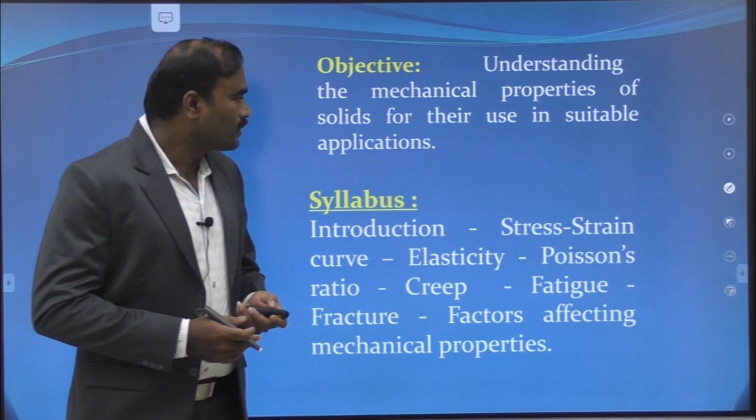Now we shall see in detail about the mechanical properties. We have various types of properties such as optical properties, electrical properties, thermal properties, magnetic properties and mechanical properties. Among the mechanical properties, four are the important ones.

They are stiffness, strength, hardness and ductility. So these are the four important mechanical properties of solids.

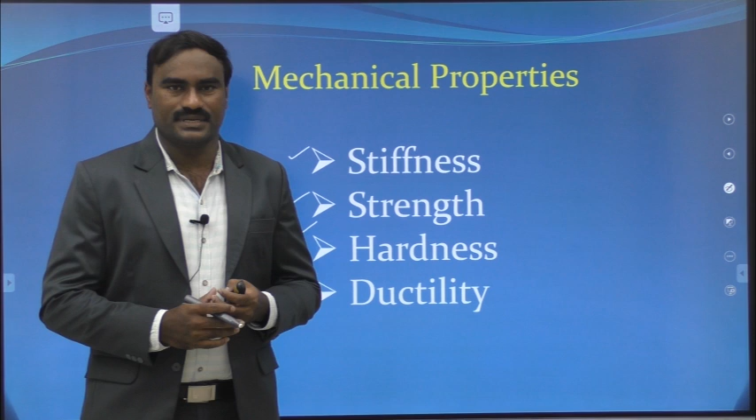Now we are going to see in detail about these properties: what is stiffness, what is strength of a solid or material, what is hardness of a material, and what is the ductility of a material.

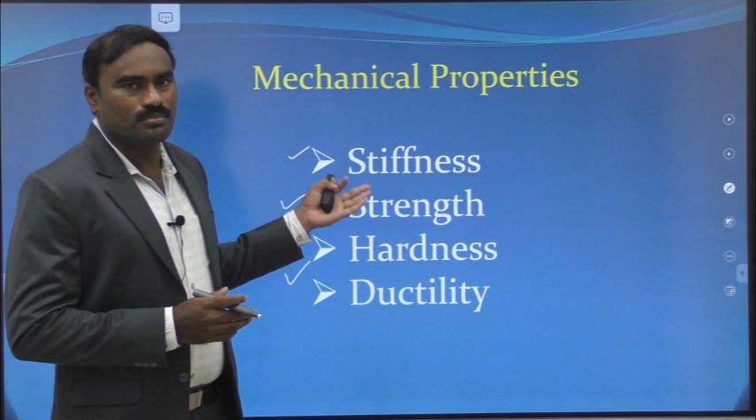Before we study about the mechanical properties of solids, we should have a minimum knowledge about what these four properties are. Now let us see one by one.

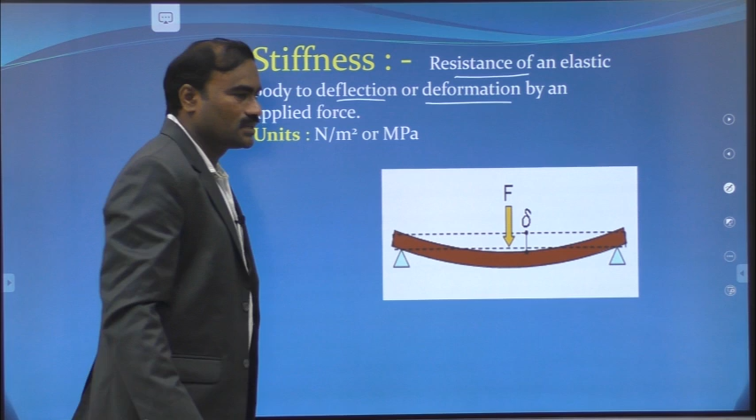First of all we shall see stiffness of a material. So what is the stiffness of a material? It is nothing but the resistance to elastic deformation - the resistance of an elastic body to deflection or deformation. That means the opposing force to bend itself, or the opposing force to changes in its dimensions, or the opposing force to strain. Now let us see what is stiffness.

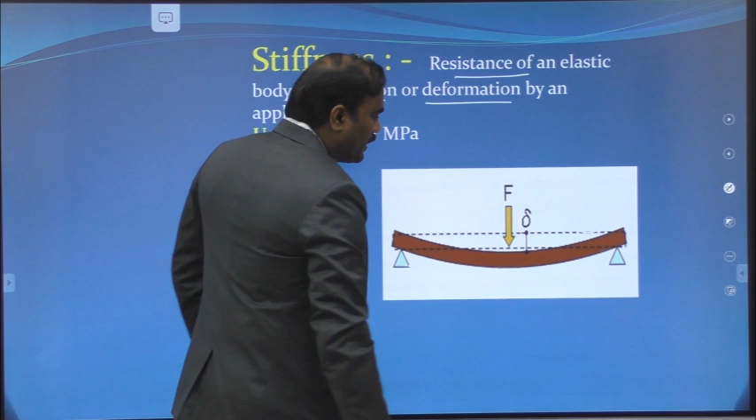Suppose if I take a particular body of original length L, and if I put that body on two supporting pillars, and if I apply some force - suppose this is a solid piece, let us suppose this is a wooden scale.

If I put a mass, a body of mass m on the wooden scale, what happens is a gravitational force of mg will be acting in the downward direction. So a force equal to the weight of the body will be acting on this wooden scale.

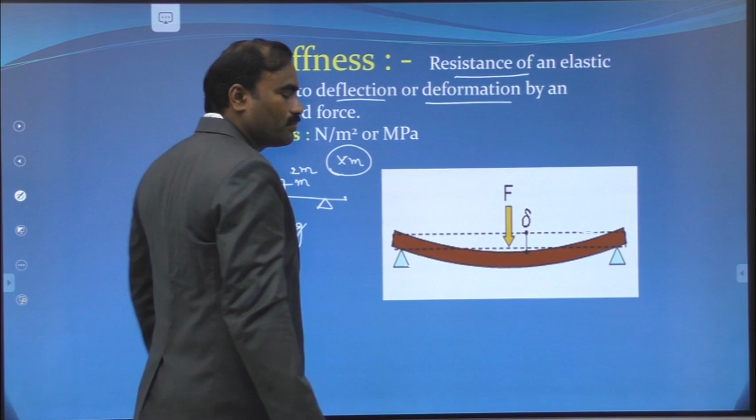Suppose if the mass of the body is very small, then there won't be bending of this wooden scale. Suppose if I increase the mass to 2m, let us suppose even for 2m also there is no bending. Suppose if I keep on increasing the mass of the body placed on the wooden scale, at a particular mass xm, this wooden scale starts bending like this.

So the mass, or the force, at which the body suffers a deflection or undergoes changes in its dimensions is called the stiffness of the body. Until the force or load is less than this xm, it will not undergo any deflection or deformation. That load or force can be considered as the stiffness of the body.

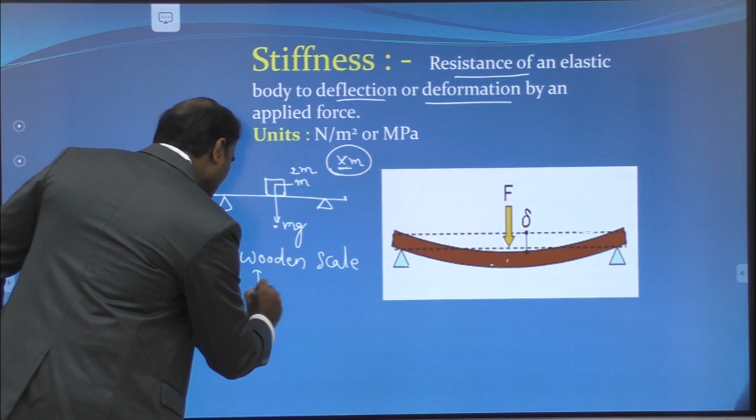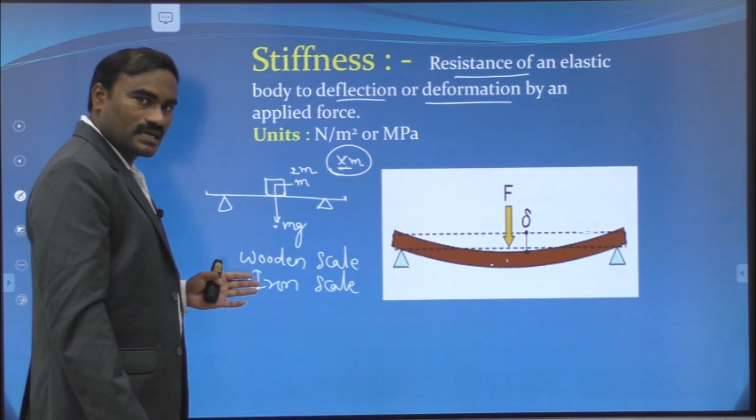If the material is more stiff, then it will bear more load, meaning we need to apply more force to bend it. For example, if I take a wooden scale and an iron or steel scale, which one is more stiff? Obviously the iron scale is stiffer than the wooden scale, because to introduce a deformation or deflection in the iron scale, I need to apply more load or force compared to the wooden scale.

So iron scale is stiffer than a wooden scale. The stiffness of a body is nothing but the resistance of the body or a solid or a material for deflection or deformation. So that is called stiffness of the body, which is a very important parameter of solids or materials, and we are going to see its significance in the coming discussions. So this is all about the stiffness of the body.

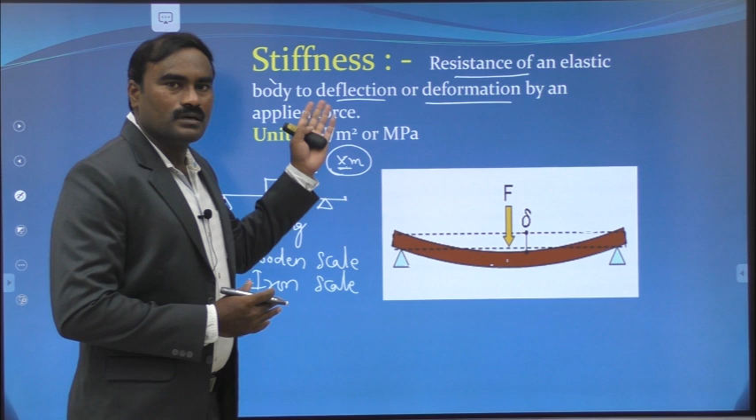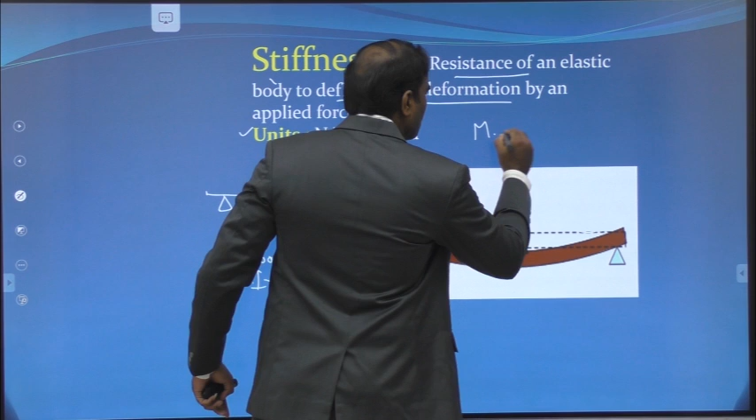Now the units for stiffness of a solid or material are Newton per meter square, or megapascal. The force which is generally applied per area. Pascal is nothing but the unit for pressure, and pressure is nothing but force per unit area. So Newton per meter square, or generally stiffness can be measured in units of megapascal. One mega means 10 power 6 pascals, or 10 power 6 Newton per meter square, since pressure is equal to force by area. So this is the unit for stiffness of a solid or a material.

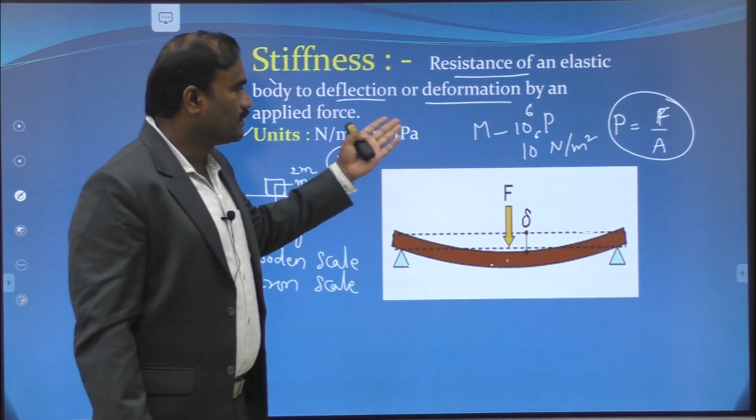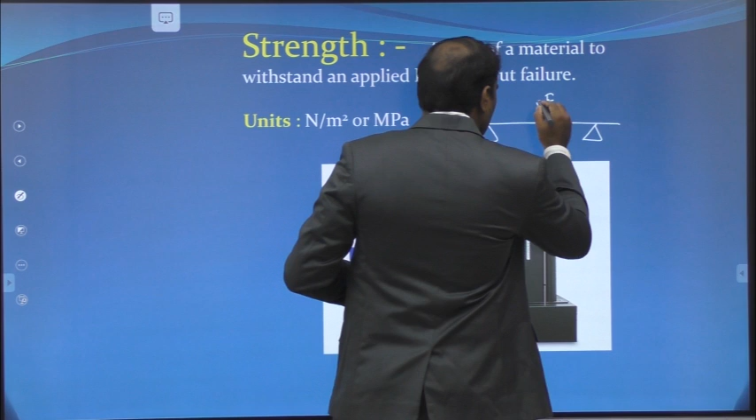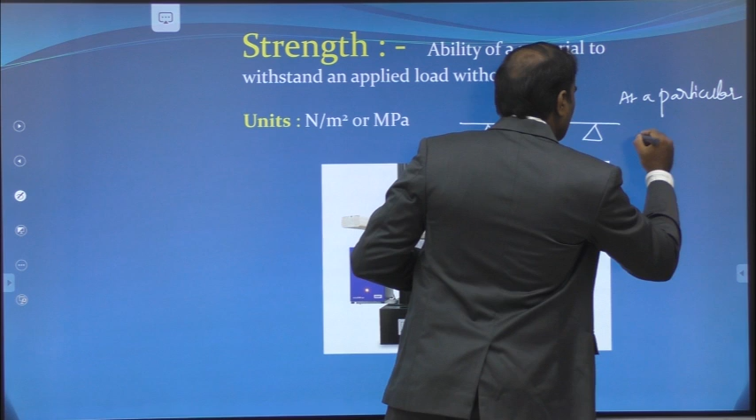Now let us see what is the strength of a material. As we saw in the previous case, suppose if we apply some load on a wooden scale, at a particular value of force it starts bending. Suppose if I apply more force, then what happens if I keep on increasing the force or load on this wooden scale? At a particular load, this wooden scale will break into two pieces. So it breaks into two pieces like this.

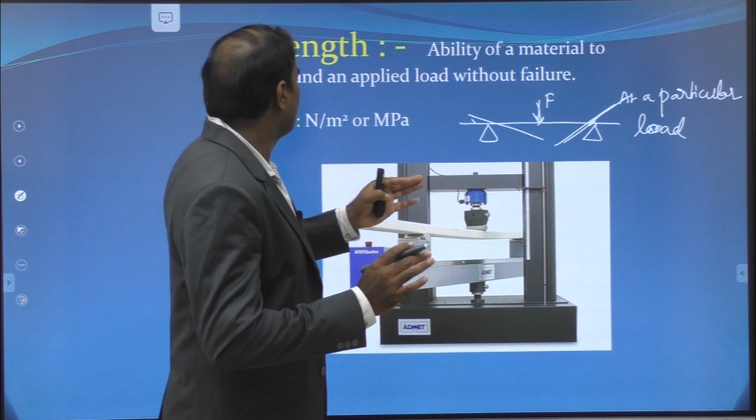The ability of a material to withstand an applied force or load without failure is called the strength of a material. In other words, we can say the ability of a material to withstand an applied load before its failure or before its fracture, that means it breaks into two pieces. The amount of load at which the material breaks into two pieces is equal to its strength.

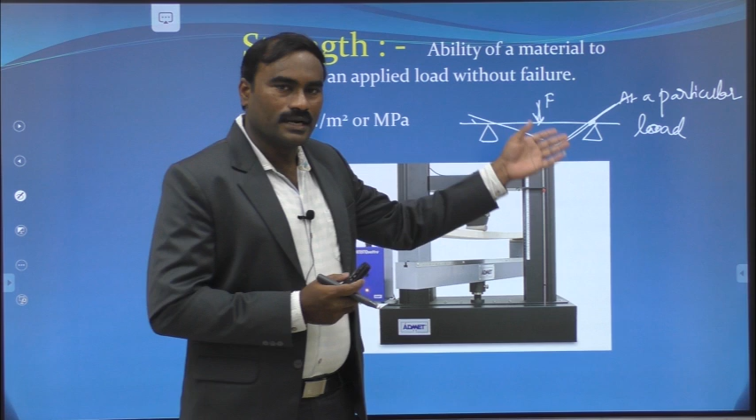So the units of strength are also megapascal, because stiffness is also nothing but the load at which, or the resistance of a body to deformation, that is also nothing but the load. Here also what we see is we apply load until the material breaks into two pieces. That means the force or load required to break the material into two pieces is nothing but the strength of that particular material, so it is also measured in megapascal.

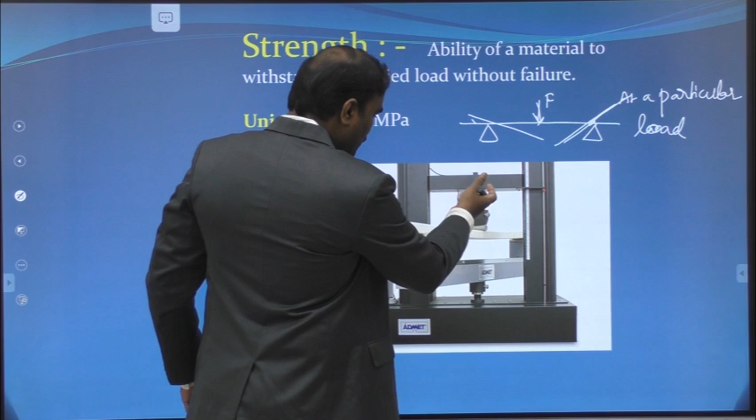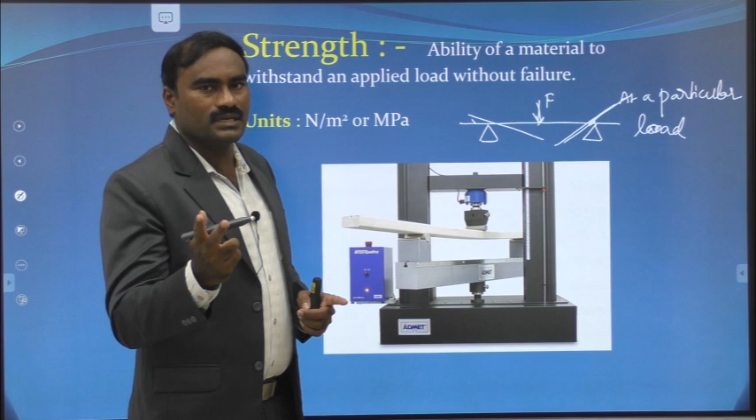You can see in this diagram, we have a wooden bar, and a force can be applied by using the machine. The amount of force applied by this machine can be read from the machine's electronic circuitry. As the force increases, there won't be any deformation until a particular force, but at a particular force this wooden bar starts bending. That means that force or load at which this wooden bar starts bending is equal to its stiffness. If we keep on increasing the force, at a particular force or load this wooden bar breaks into two pieces, so that load will be equal to its strength.

So in brief, what is stiffness and what is strength? Stiffness is nothing but the resistance of a body or material to deflection or deformation. That means the load or force at which the body starts bending is equal to the stiffness of that material. Suppose if you keep on increasing the load or force, that particular body breaks into two pieces, and the load at which it breaks into two pieces is equal to the strength of that particular body.

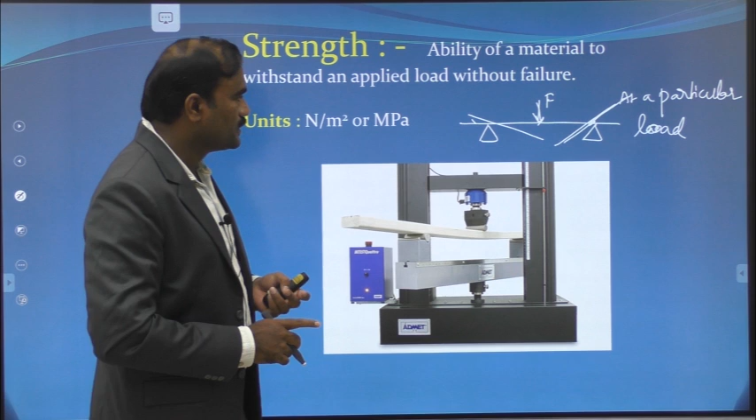So this is about stiffness and strength. The third property of solids or materials is hardness. Hardness is a property of a solid. It can be defined as the resistance of a body to indentation or abrasion, by mechanical indentation or abrasion.

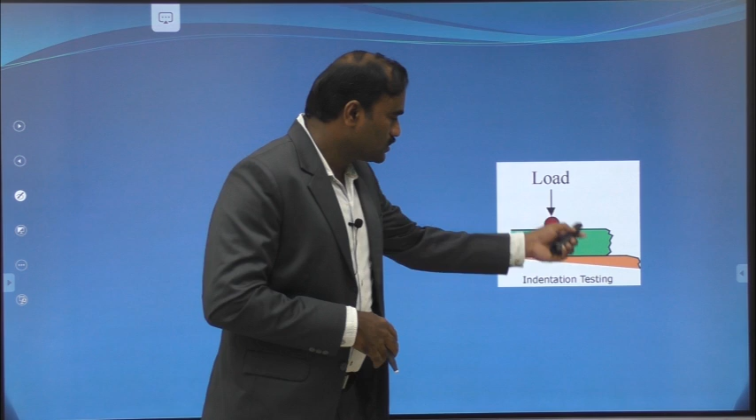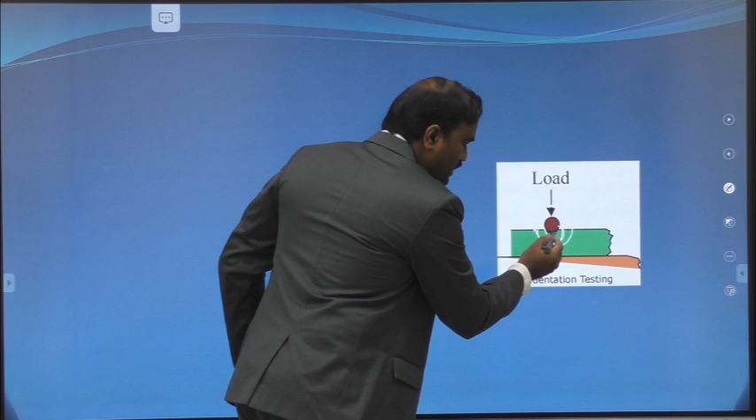So indentation means, if you apply a load at a particular point on the body, the whole body will not exhibit deformation, but there is deformation only at a particular place. That means the deformation of a body is localized. So what is happening if I apply force here like this? There is a small bending of the surface of this particular body at this point, and that is called indentation.

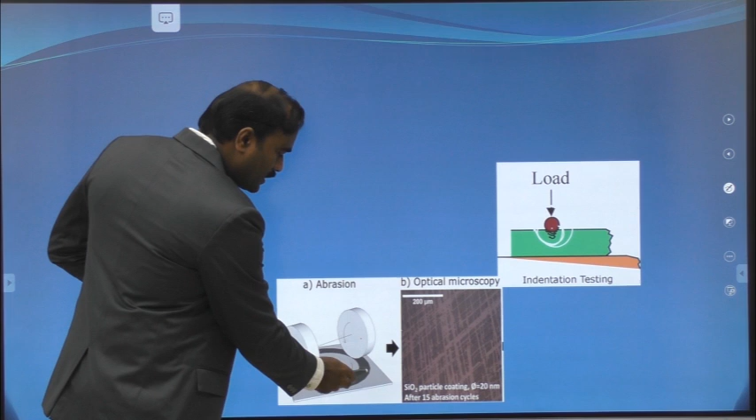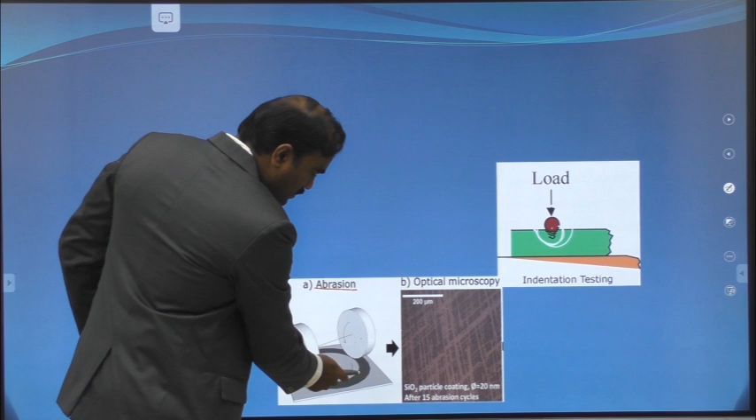Another one is abrasion. Suppose if you see this diagram, we have two rolls, and these two rolls are allowed to move in a circle. While these two rolls are moving on the circle, there will be friction between this plate and these rolls. Because of this friction, there is a process called abrasion, meaning there are some scratches which we cannot see with our naked eye. If you see the scanning optical microscopy picture of this particular base plate, it will look like this.

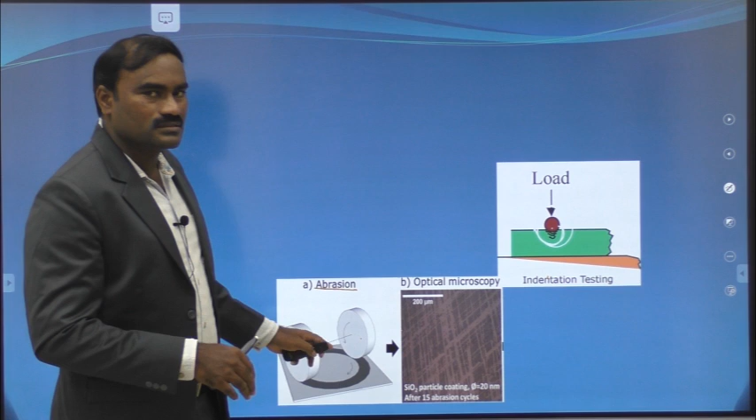So this kind of scratches are made because of the rolling of these rolls on this particular plate. So this is called abrasion, and this is called indentation. Hardness of a material is nothing but the resistance of a body to plastic deformation or localized deformation, either by mechanical indentation or by abrasion. Indentation is a plastic local deformation, meaning there is a bending of the surface at a particular point where the load is applied. Abrasion means, because of the friction between two surfaces or two bodies, we have scratches on the bodies.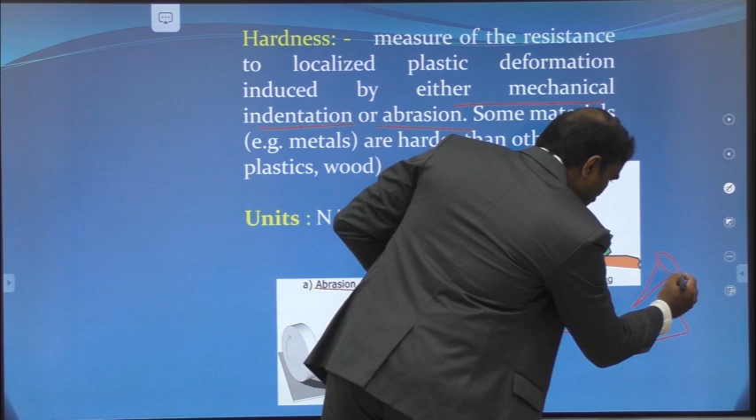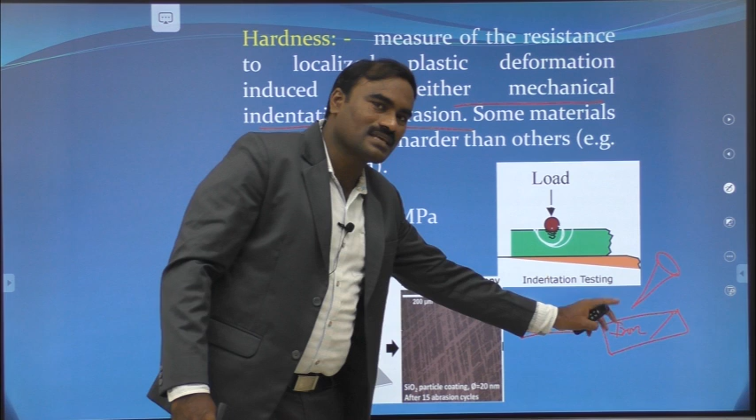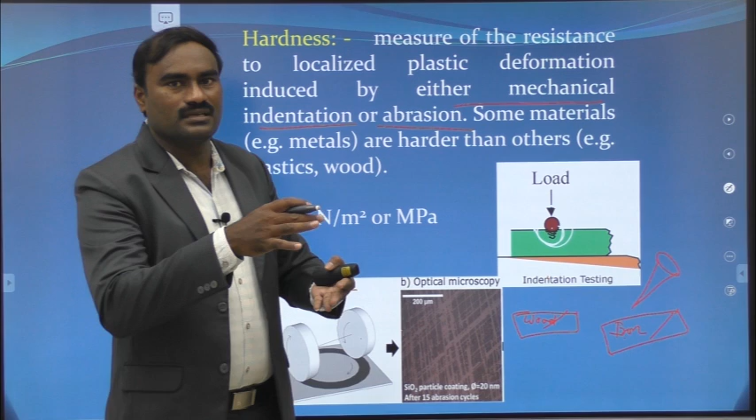Now, for example, if I take a wooden piece and an iron piece, and if I take a sharp nail, and if I try to make a scratch on wood using this sharp nail, and also make a scratch on the iron with this sharp nail, what happens is we have a clear scratch on the wood, but it is very difficult to make a scratch on the iron or steel, because iron has more hardness compared to wood. So abrasion or indentation is difficult on iron, whereas you can easily make a scratch on the wood. So if the hardness is high, we cannot make scratches on a hard material so easily.

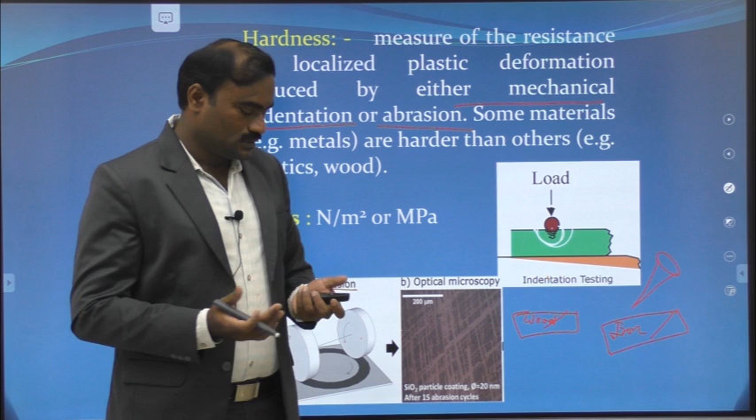Metals, if you take metals, most of the metals are harder materials. So most of the metals have high hardness. So this is about the hardness property of solids.

The ability of a material to withstand load before its failure — this third property we have seen is hardness. It is nothing but the resistance of a body to local deformation, either by mechanical indentation or abrasion. So in detail, I have explained what is indentation and what is abrasion.

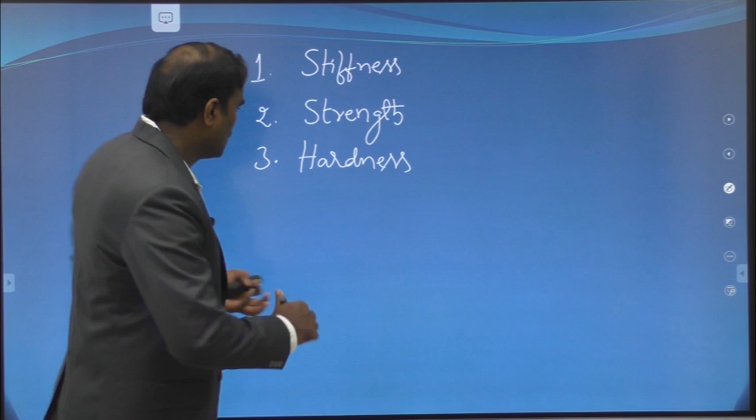And the fourth one is ductility. Ductility is a very important property of metals. Because of this ductile property, metals have a lot of applications in various fields. So this is all about the important mechanical properties of solids.

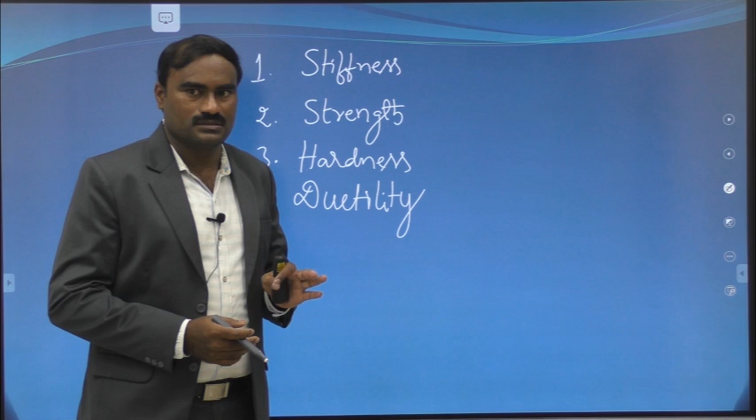Now we are going to see the immediate question that arises: why should we study these mechanical properties? Why do we study mechanical properties of solids?

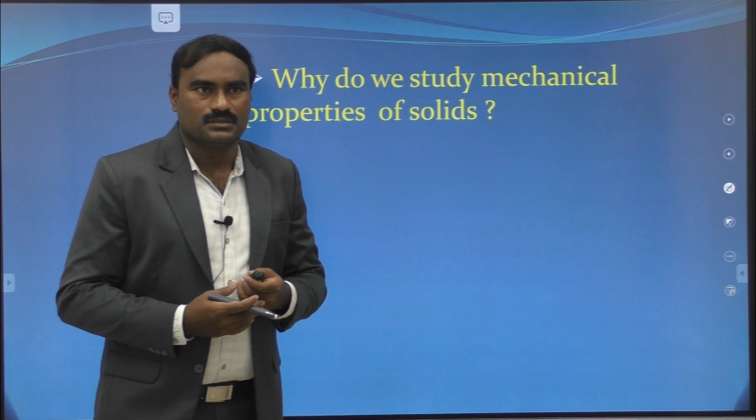Suppose we have a policy. The policy is this one: cheap and best. The man is always looking for a better thing at a lower cost, so that it will be available to all of humankind at an affordable cost.

Suppose if I want to make a cycle or a bike, and if I want to choose a metal or material for a wheel, then I must have knowledge about its mechanical properties such as stiffness and strength, mainly strength. Without knowing the strength of this particular wheel, I cannot use it in a particular application. The same wheel which I use for a cycle, I cannot use for a motorbike. The same wheel which I can use for a motorbike, I cannot use for a car.

The wheel which I can use for a car cannot be used for a bus or lorry, because the load is changing from vehicle to vehicle. So as the load changes from vehicle to vehicle, we need a higher strength material, and that strength should be high while the cost should be low.

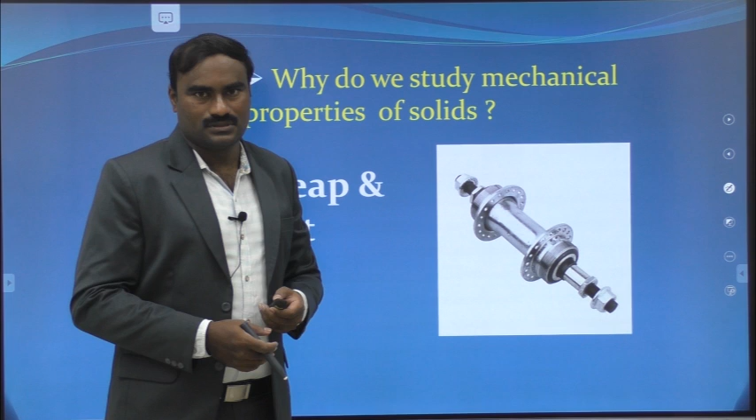Even though a particular material has higher strength, that alone will not serve the purpose. There is a condition: cost. Cost should be low, that means it should be economical. For example, silver has higher electrical conductivity compared to copper, but we use copper instead of silver in almost all our applications, because silver is a very high cost material. So we use copper, which has slightly lower electrical conductivity compared to silver. So two things: the property should be high, strength of the material should be high, and at the same time it should be available at a lower cost.

So to find a material which has high strength or high mechanical properties, and at the same time low cost, we need to study the various types of materials that are available to us.

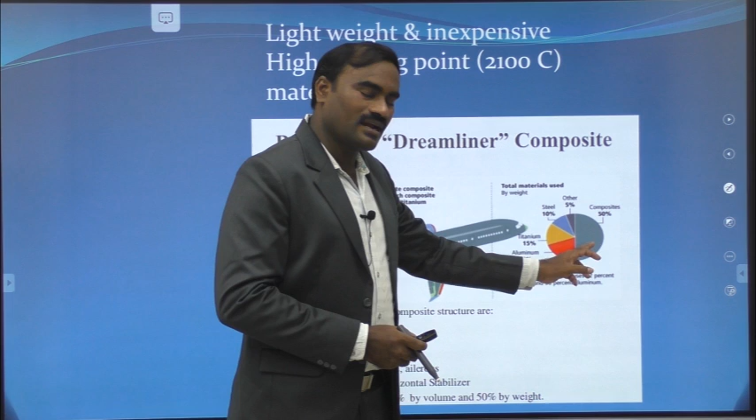Now, for example, take the Boeing Dreamliner, the advanced aircraft Boeing 787 Dreamliner. It has largely been made up of carbon reinforced materials, polymers, composites. This aircraft is made of 50% composites, 10% steel, 15% titanium, 20% aluminum, and 5% other materials.

By the way, the first plane was made up of wood, and then the whole aircraft was made up of aluminum, and then titanium came into play. Titanium offers high strength and is lightweight.

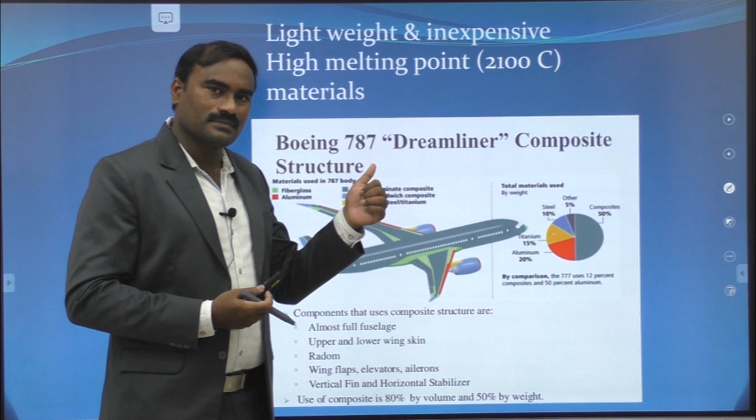The main requirement in aircrafts is that the material should have high mechanical properties and other properties, but at the same time its weight should be very, very low. Because if the weight of the aircraft increases, then fuel consumption increases. So they are both proportional to each other.

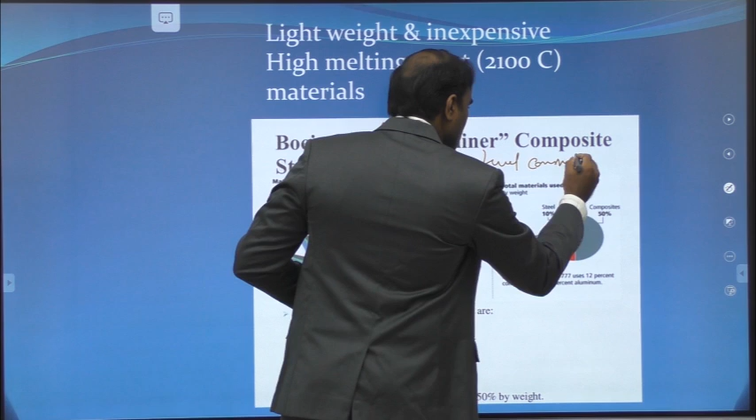So to conserve fuel and save money, or to make air travel available to everybody, we should decrease the cost of maintenance. So what people are doing is, they have made this aircraft using 50% carbon reinforced polymer composites. If the weight decreases, fuel consumption decreases, and hence cost of maintenance decreases.

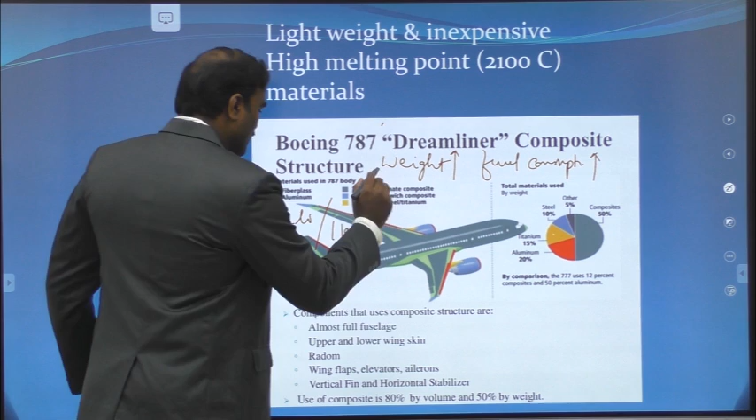In fact, 12 liters of fuel are consumed per 1 kilometer by aircrafts. For a car, 1 liter of petrol gives around 20 kilometers mileage, but here it's reversed: 12 liters per 1 kilometer for aircrafts. Suppose, because of using these lightweight materials, it goes down to approximately 8 liters per 1 kilometer in this 787 Dreamliner. This is the most efficient, economic flight available today.

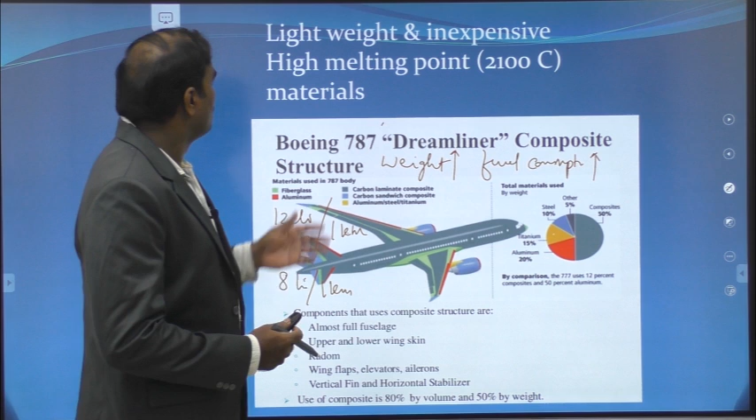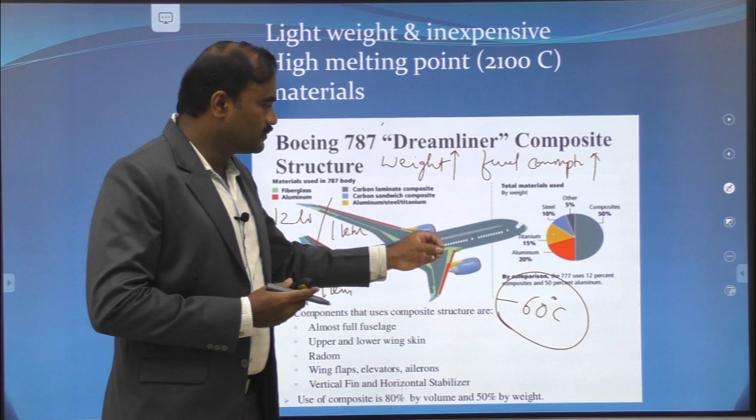In the flight engine, a very huge amount of heat is produced, in the range of 2100 degrees centigrade, and we need a material which withstands very high temperatures as well as low temperature, because this flight travels 12 kilometers above the surface of the earth, where temperatures are minus 50 to 60 degrees centigrade when in flight. So the engine materials we use for making the aeroplane engine should withstand both higher and very low temperatures.

So the selection of these materials is done by very careful investigation of all their mechanical properties, electrical properties, thermal properties, and so on. We have to study in detail the properties of solids, especially mechanical properties, if we want to use them in such applications. So this is the introduction of this chapter, mechanical properties of solids.

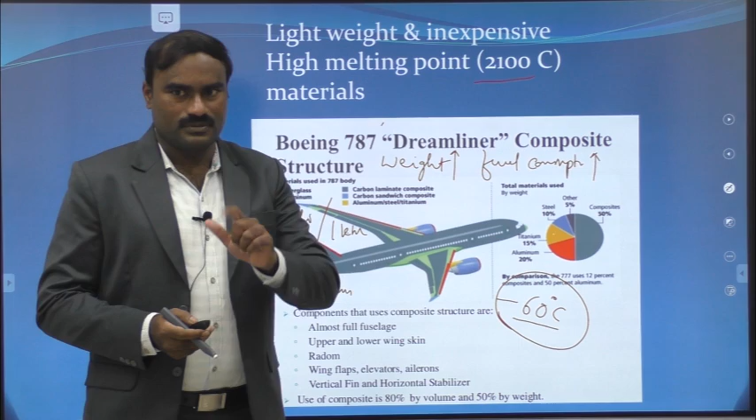Up to now we have seen the introduction of solids. We have learned about the important mechanical properties: stiffness, strength, hardness, and ductility. Stiffness is the resistance of a body to elastic deformation. Strength of a body is the maximum load that a material can withstand before failure. Hardness is the resistance of a body to localized deformation, either by mechanical indentation or by abrasion. And then we have seen ductility.

So that is the property exhibited by the metals, meaning these metals will exhibit a large plastic deformation. And then we have seen what is the need to study the mechanical properties of solids.

Now we are going to see the actual topic of these mechanical properties of solids. So let us start with engineering stress. So what is stress?

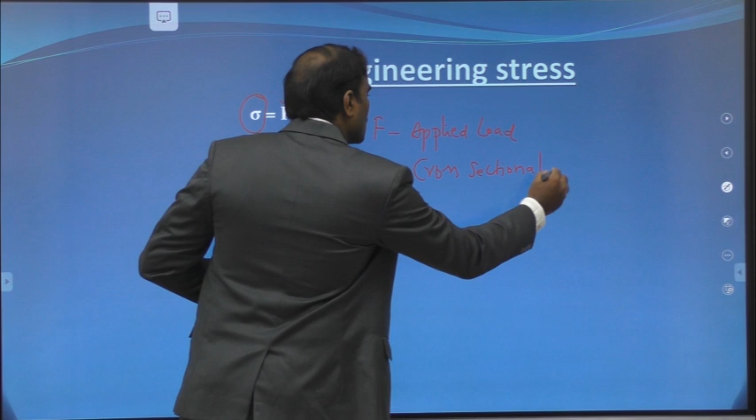So this force is the applied load. F is nothing but applied load. A naught is the cross sectional area. So engineering stress is nothing but the ratio of applied load to the cross sectional area of the body, or you can also define it as the amount of load that is applied for unit area of the body. So that is engineering stress.

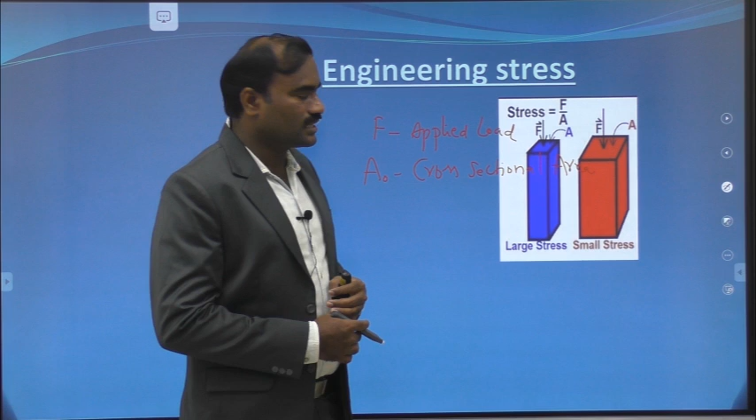Say for example, if you take this particular rectangular block, so the force is applied like this, okay. If you see, the area is small in this object, whereas the area is large in this other object, but the amount of force that is applied is same.

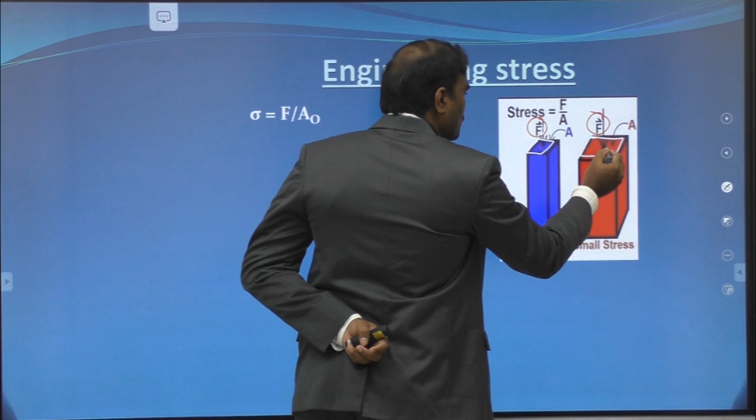So the amount of force applied is same, but this body has smaller cross sectional area compared to this body. So according to the formula, because A is small here, the stress is large for the same force. Remember, the applied force on the two bodies is same, but the two bodies have different cross sectional area. So if the area is high, then the stress will be small.

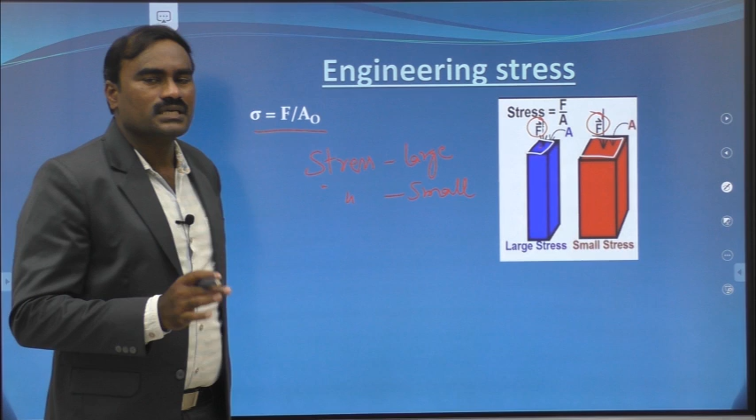So the engineering stress depends upon the cross sectional area of the specimen or body. If the area of the body is high, then stress will be small. If the area of the body is small, then the applied stress will be large.

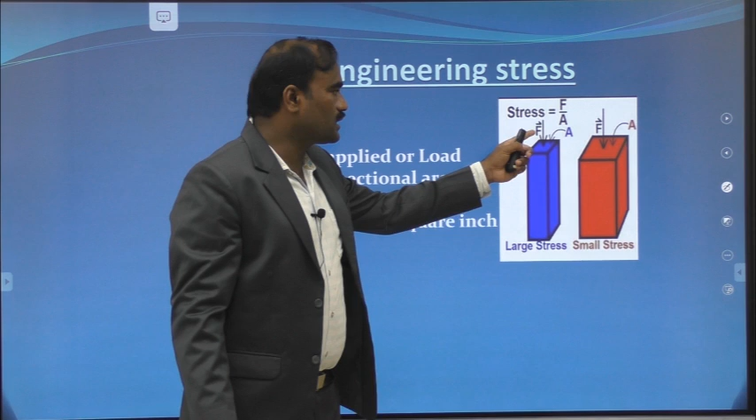So if F is force applied or load, the units again here also what we are doing is applying a force, so that is nothing but load. So the units for stress are also megapascal. Generally we take it as megapascal or pounds per square inch, but we don't use that here. So the general unit that we use is megapascal, that means 10 power 6 Newton per meter square, or psi, pounds per square inch. So this is about engineering stress.

We have the question, where do we see this kind of stresses, or where do we apply this kind of forces or loads? We are talking about mechanical properties of solids. Suppose if I want to build a bridge on the canal using iron, then first thing I must know how much load will be applied on that particular bridge. That means whether the bridge is meant for walking of persons, or is it meant for light vehicles, or heavy vehicles, and so on.

So if I make a bridge on a canal, then vehicles will be going on the bridge. The moment they enter the bridge, they will apply some force. Suppose this is a bridge, and say for example a car is moving on it. So what happens is, when it is on the bridge, it has mass mg. That force will be applied on that particular iron which is used to make the bridge. So this force will be applied, and if the body has lower strength than the weight of the body, then failure will occur.

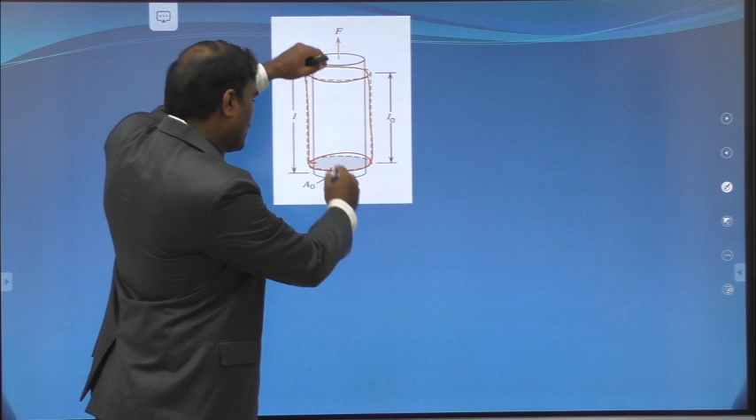This is the original body, and I am applying stress like this, that means force like this. So if I pull a particular thing like this, then what I am doing is I am applying tensile force. So this force is called tensile force or tensile stress.

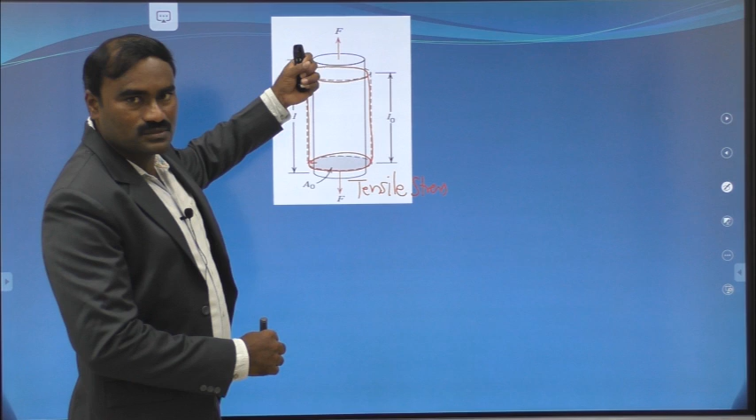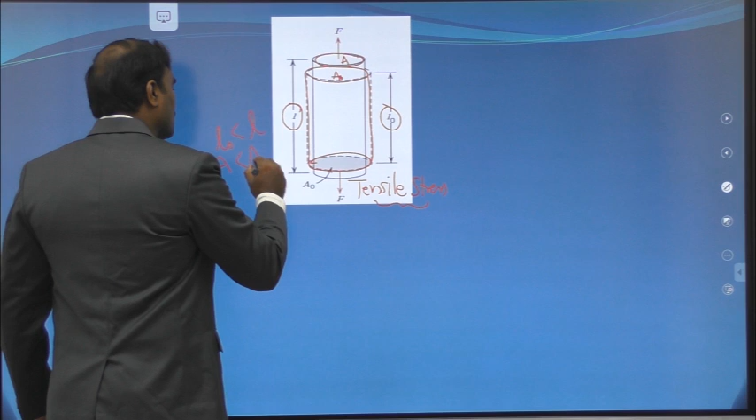So if I apply like this, what happens is there is a change in the length. If L0 is the original length, then the length changes to L, where L0 is less than L. At the same time, when we applied tensile stress, there are changes in the cross sectional area. This is the cross sectional area A0, and this is the cross sectional area A after applying the tensile stress. So A is less than A0, or A0 is greater than A.

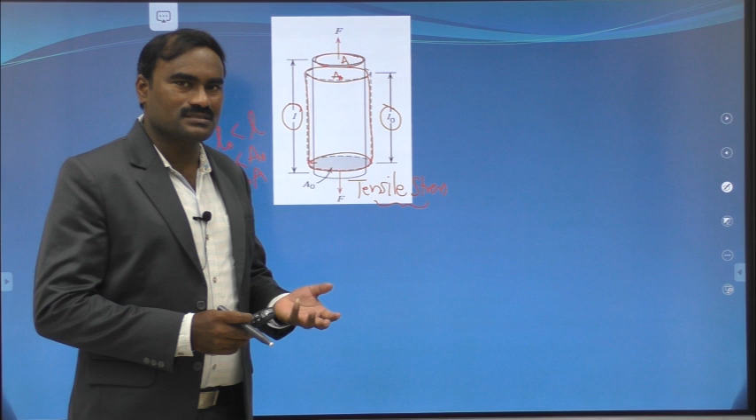So this is one kind of stress, a very familiar stress that has been applied in many bodies. In mechanical engineering, we have a tensile test, that means the measurement of body strength by applying tensile stress. That is a very famous experiment that every mechanical department has, called the tensile test. So tensile stress is the first one.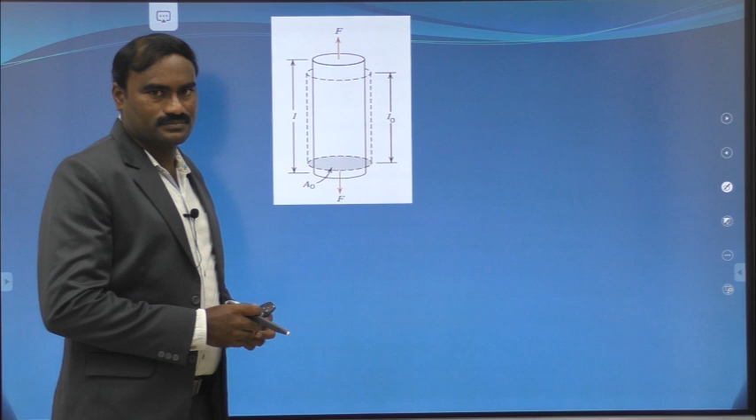So when we apply tensile stress, there will be a change in the length as well as a change in the cross sectional area. The second one is compressive stress.

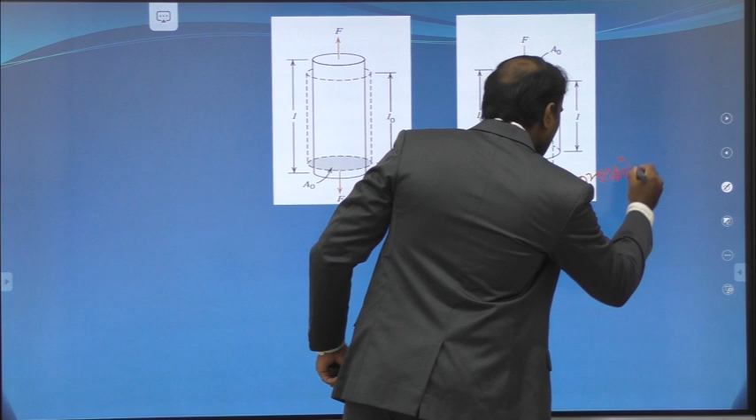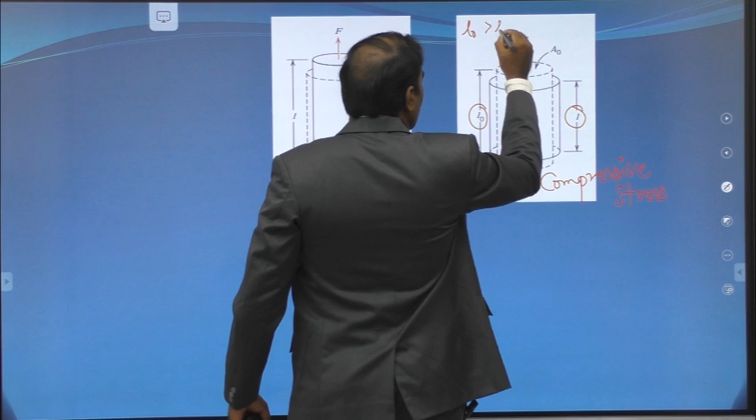The second one is compressive stress, that means compressing, applying the force like this. When we apply compressive stress, L0 is the original length, L is the length after applying the stress, then L0 is greater than L. Similarly, A0 is less than A. So here in tensile stress L0 is less than L and A0 is greater than A, while in compressive stress L0 is greater than L and A0 is less than A. So tensile stress and compressive stress are exactly opposite.

In tensile stress we apply force like this, that means on both sides the force will be directed away from the body, but in compressive stress, from both sides the force will be directed towards the body. So this is tensile stress and this is compressive stress.

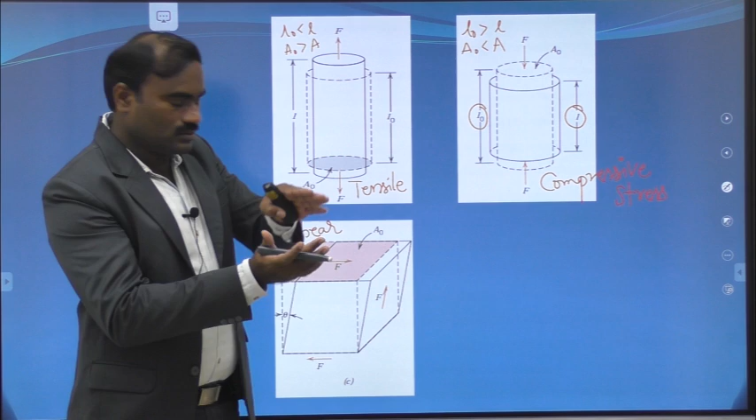The third one is shear stress. That means we apply force like this on the surfaces. We have the bottom surface and the top surface. At the bottom the force will be in this direction, and at the top the force will be in the other direction. Because of this stress we have deformation, and the deformation will be measured in terms of theta.

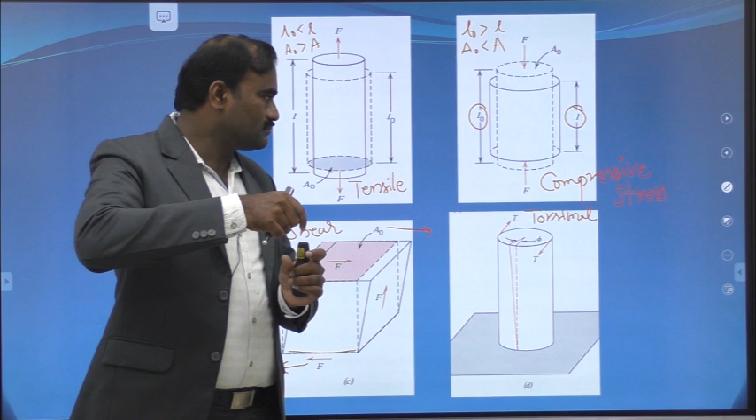And the fourth one is torsional stress, that means twisting. Suppose if I close the cap of a particular bottle very tightly, what I am doing is I am applying torsional stress. So what happens is we have a deformation like this. It is supposed to be here, but because we apply a torsional force like this, it is displaced from here to here.

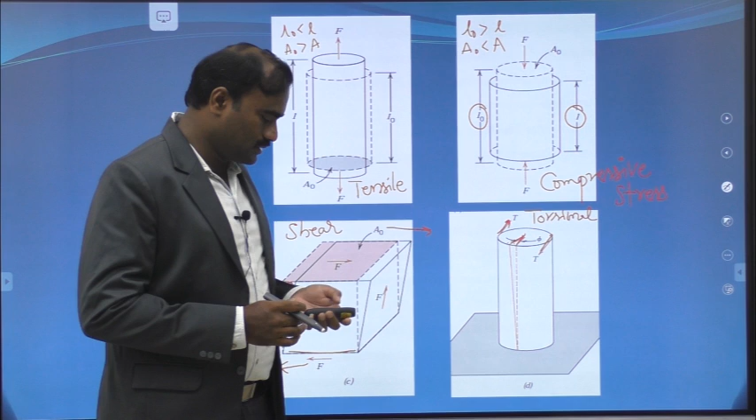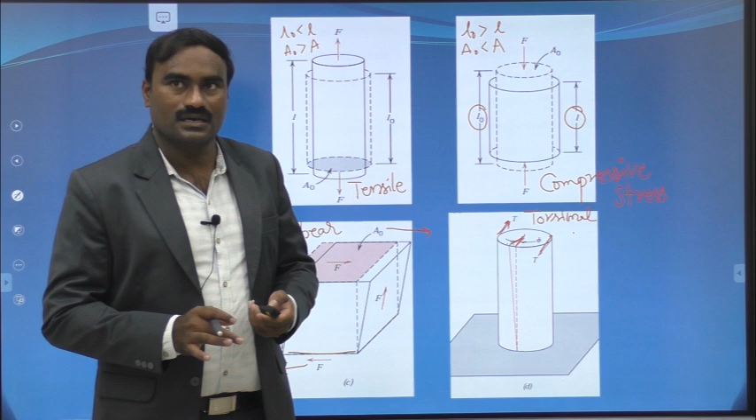So these are the four types of stresses that we encounter in our day-to-day lab or in mechanical properties of solids. The first one is tensile stress, second one is compressive stress, third one is shear stress, and the fourth one is torsional stress. So these are the four types of stresses that are available.

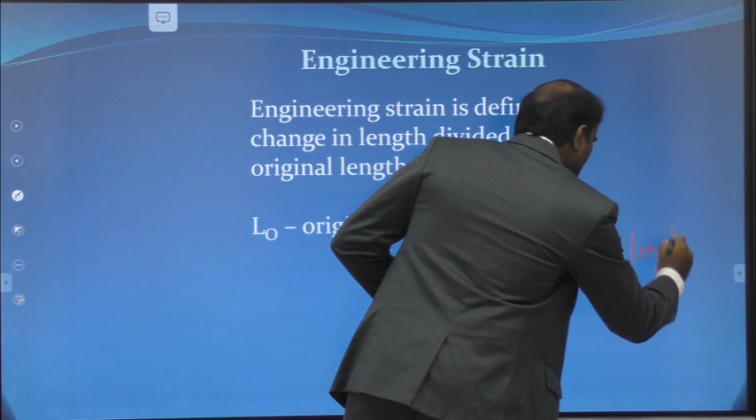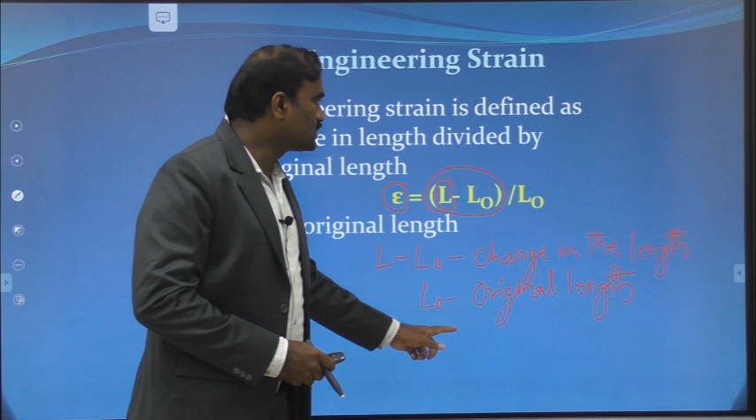Now we are going to see engineering strain. What is strain? L0 is the original length of the body, and L is the length of the body after applying the stress, say for example tensile stress. So the strain epsilon is defined as L minus L naught, which is nothing but the change in length, divided by the original length L naught. So the strain can be defined as the ratio between the change in length and the original length, or the change in length divided by the original length, and this is called the engineering strain or strain.

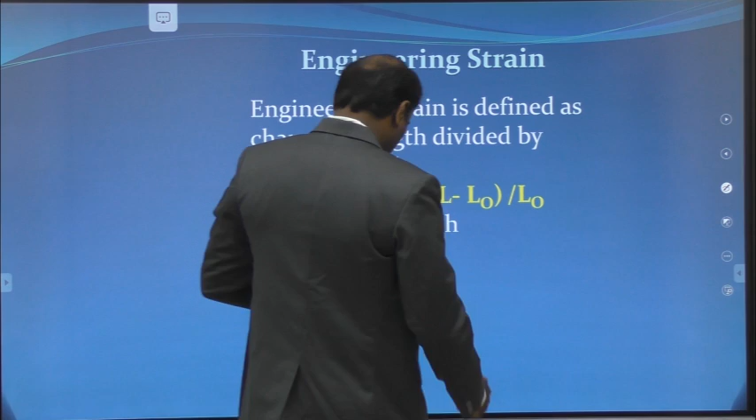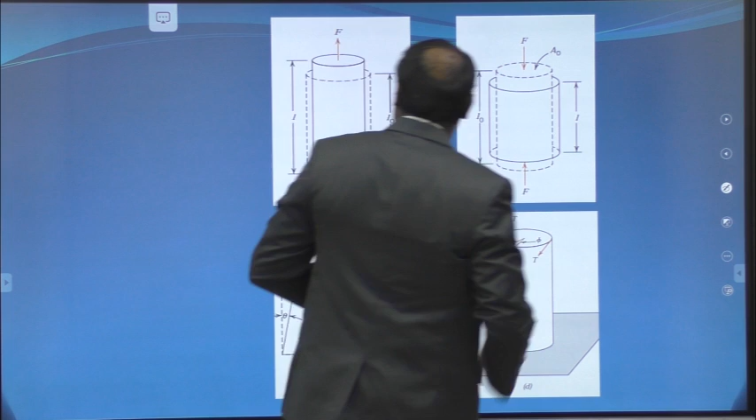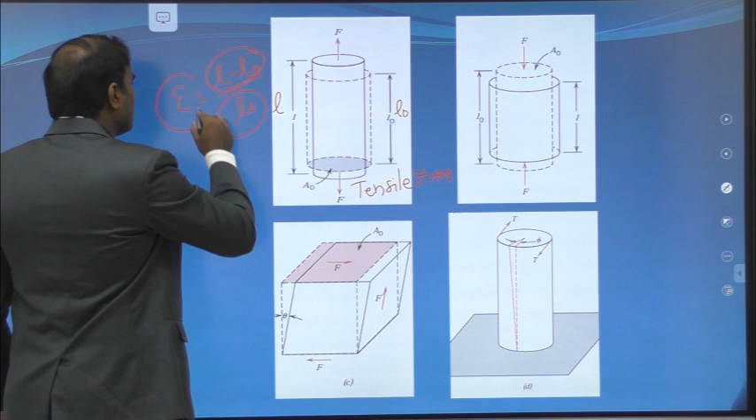Suppose if I take a piece of length L, or okay, we can go back. So L naught is the original length, and L is the length after applying the tensile stress. Because of this tensile stress, there is a change in the length of the body. So the strain can be defined as L minus L naught divided by L naught. So the change in length divided by the original length gives us the strain of the body, or it gives the deformation, how much the body is deformed because of the applied load or force, which can be given by the engineering strain.